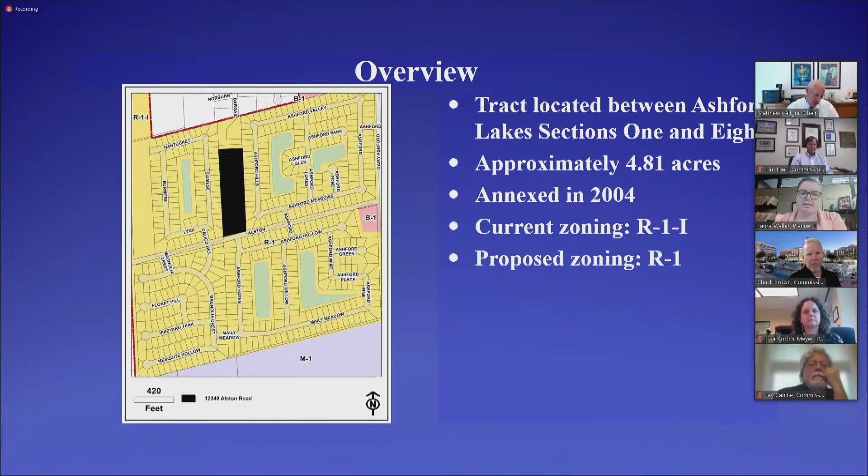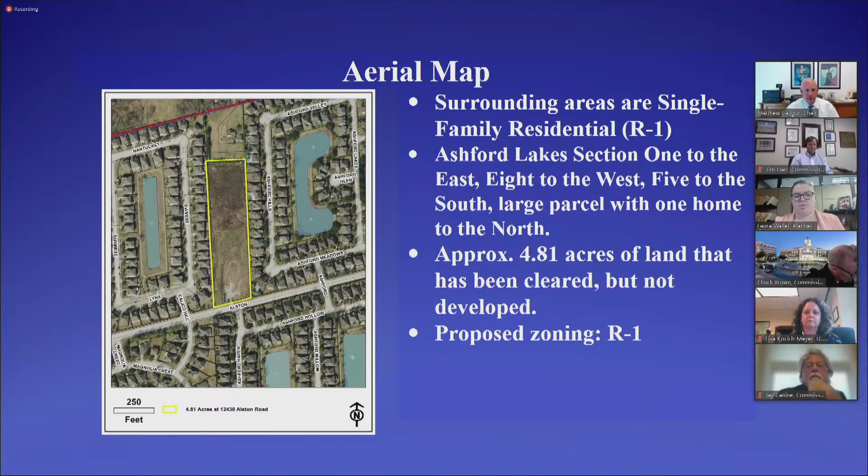Next slide. So here is an aerial map of the area. It has been cleared of all large trees, but there is some scrub brush, some taller grasses. Here you can also see that at the rear of the property is a large single family, more rural area. And then to either side and to the south is single family standard residential in Ashford Lakes sections 1, 8, and 5. Again, the property has remained vacant since its annexation, and so the owner is now ready to move forward with platting and developing the property as standard single family homes. Next slide.

The future land use excerpt and the comprehensive plan do categorize this property as a suburban neighborhood, which is in line with the surrounding uses and does align with the standard single family residential district. Next slide.

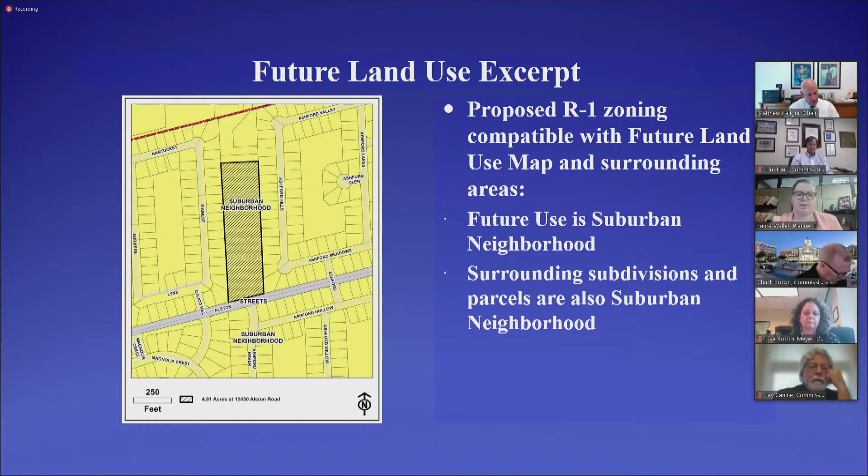The public hearing requirements were all met, and a courtesy sign was posted at the property, as well as mailers sent out to owners and the Ashford Lakes HOA. There was also published notification in the newspaper and online. We did receive 3 inquiries, 2 by phone and 1 by email. At the time of writing the slides we had one online comment form, but as of today we've had 4 online comment forms come in.

So there has been some concern from the Ashford Lakes HOA board members, just wanting to make sure that this was going to be single family homes and that it would not affect their property values negatively. Next slide.

So your initial points for consideration tonight: this is just under 5 acres and was annexed in 2004. However, permanent zoning is required prior to development. It's currently unplatted and undeveloped, just cleared. The requested zoning is compatible with the existing zoning districts surrounding it, as well as with the comprehensive plan and thoroughfare plan. Next slide.

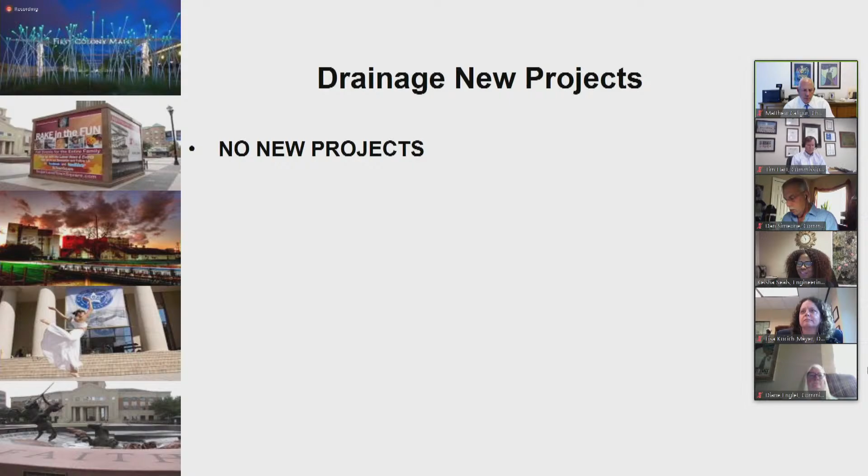The next slide is the municipal projects. There is one project being recommended to move forward in FY23: the Emergency Preparedness Program. This program will predominantly be funded through various FEMA and emergency management grants, which would require the city to have matching funds. This list is a prioritized program developed by staff and by best management practices, identified as far as equipment and infrastructure needs for continual emergency operations.

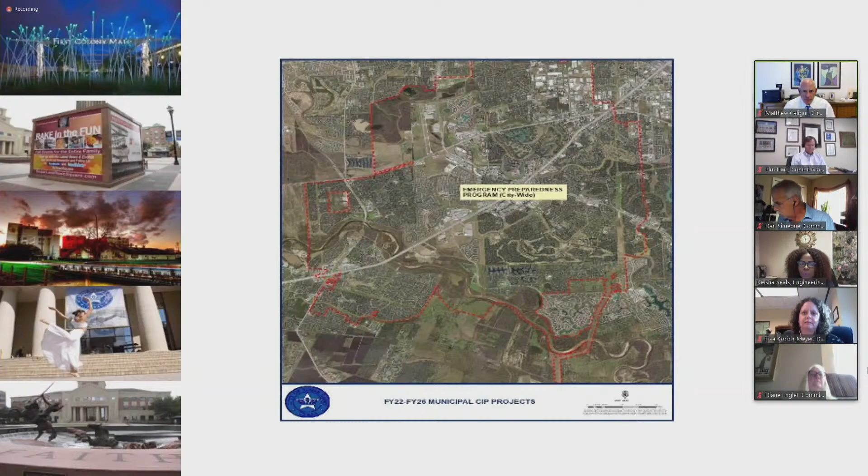Next slide. This project is a citywide project because it would help all facets of our emergency operations, and the map shown just identifies that it is citywide. Next slide. Next, we'll step into parks.

There are a couple of parks recommended projects to move forward. The first one is the 65-acre community park. This was recommended by our 2018 Parks and Recreation and Open Space Master Plan. This project will revisit some of the programming and lay out the park to create really a destination and centralized location within the city. It will also include improvements to the existing cemetery by designing for a historic and cultural destination site.

The next project is the skate park relocation to Crown Festival Park. The skate park currently is in City Park, but we are looking to relocate it to Crown Festival Park to allow for more synergy within that park, complementing the mountain bike trails we currently have and the proposed pump track we are looking to install. The project will also include converting the existing skate park to a covered pickleball court—different amenities, but definitely great opportunities to provide activities for our residents in both locations.

The next slide would just be the overall map showing the approximate locations for the 65-acre park as well as the skate park.

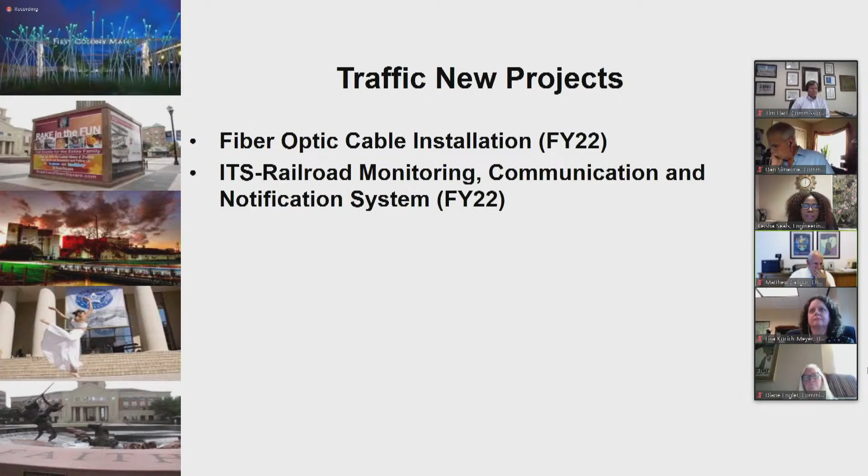Next slide, please. That's just a map showing the overview.

Stepping into surface water, there is one new project: the North Wastewater Treatment Plant Reuse Project.

As you know, we have an integrated water resource plan that has identified projects for the city to move forward in an effort to continue to be in compliance with the Fort Bend Subsidence District regulations, as well as make sure that we are efficiently and effectively having great quality of water resources.

So this PER will study the reclaimed water facility at the North Wastewater Treatment Plant, which of course is located off of 59.

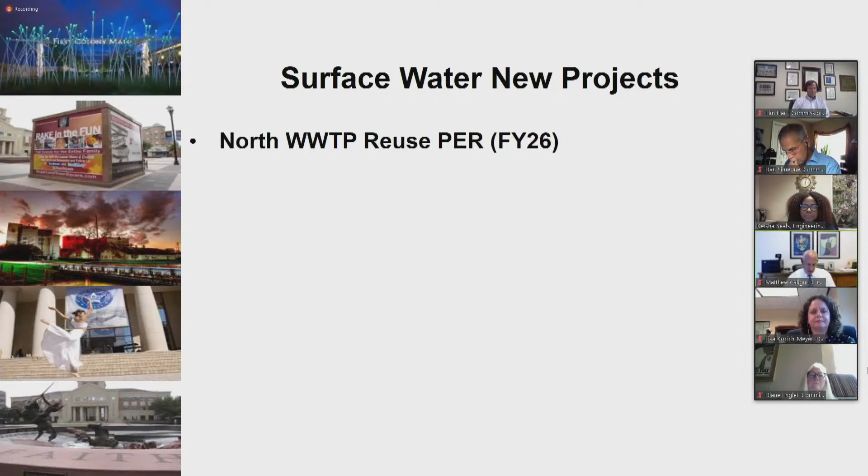Next slide, please. And there's the map.

Stepping into wastewater, there are several projects identified in our wastewater program. The first one is a citywide wastewater generator assessment project.

This is a programming project, and you will also see this in the water projects. This project has been identified based off of the winter freeze that we had in 2021.

It was determined that there was a greater need to invest in the rehabilitation and/or replacement of different generators. So the goal of this assessment is to identify the current conditions of all of our generators and see what needs to be done in those locations.

Whether they need to be replaced or whether they can be rehabilitated. The next project is the West Wastewater Treatment Plant Expansion Study.

This is a study based off of a previous study that evaluated the potential flows contributing to the West Wastewater Treatment Plant or the North Wastewater Treatment Plant service areas. That study determined that the West Wastewater Treatment Plant service area would provide a better alternative for conveying future flows from our areas.

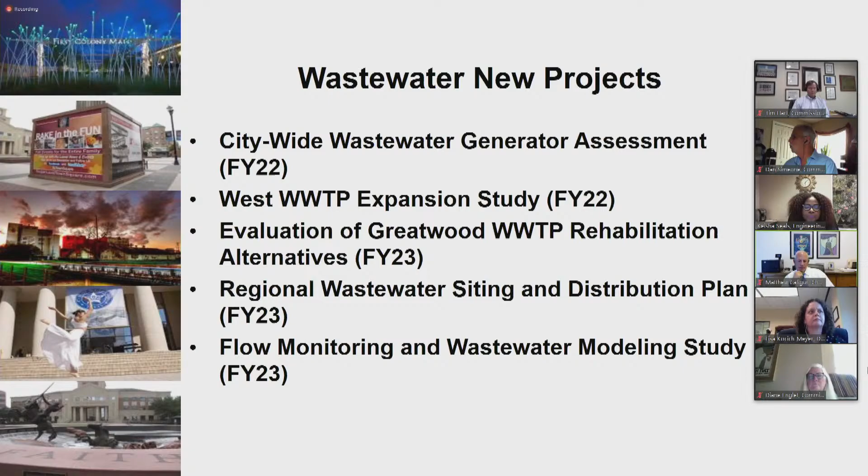So the first one, again, we talked about the wastewater generator assessment. This is the equivalent for the water side, so I won't really get into it. It's basically doing the same thing. These projects will run concurrently as well.

The next one is the main system water modeling study and capacity recommendations. Again, projects that you are seeing tonight mostly came from our wastewater master plan or our water master plan. So this is a project that came from our water master plan. This study will complete the model for our city main system, which would provide staff with hydraulic models of the entire system and identify future capital improvement projects and planning level costs for those projects.

The next project is the utilities cost for the Soldiers Field Road project. As we identify roadway projects to be improved, we also often have the utilities that would need to be improved with that project funded from the enterprise funds or from the utility funds. Soldiers Field is an extension of the Soldiers Field Court from Highway 6 and First Colony. This project will construct a 12-inch water line that is needed to serve the future animal shelter, PD courts, and our emergency operations center within that area. I would say that this was also a 2019 GO bond project, so you will be seeing this come up often because that project is ongoing.

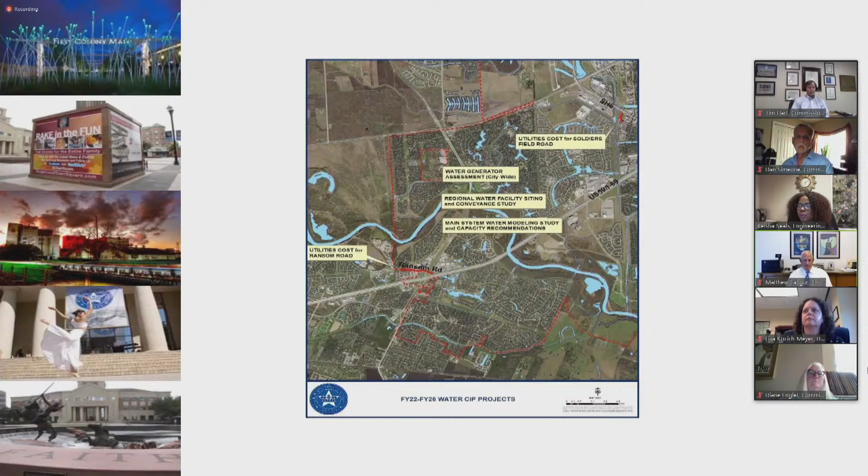The last water project is the Regional Water Facility Siting and Conveyance Study. Again, this is from our water master plan, and this is a model that will confirm what type of infrastructure improvements will need to be done at Greatwood for our capacity to serve the growth projected in our ETJ. This study will analyze the regional service alternatives for that area. Next slide, and this is just a map showing those locations, approximate locations.

And with that, that is the end of the presentation. So staff is asking that the Planning and Zoning Commission recommend the FY 22 through 26 capital improvement program, new projects list to the city manager and city council. And with that, I will entertain any questions you may have.

Thank you, Keisha, for that very detailed, helpful report. We'll go through the line and see if we have any questions from our commissioners. Commissioner Anglin?

Keisha, thank you, that was very informative. I learned a lot more about the details involved there, and I want to thank you for all the time and effort you put into that. The street modifications, I know our residents are going to be very happy with the choices y'all made to make those improvements. So other than that, listening to your other projects, I don't have any questions at this time. Thank you, Commissioner Hart.

I guess I'm surprised there's no drainage projects. That's pretty surprising. So if you recall, a lot of our drainage projects have been moved into the GO bond, and there was a 2019 GO bond approval of the drainage projects that are currently ongoing. So there are no new drainage projects because there's no new bond.

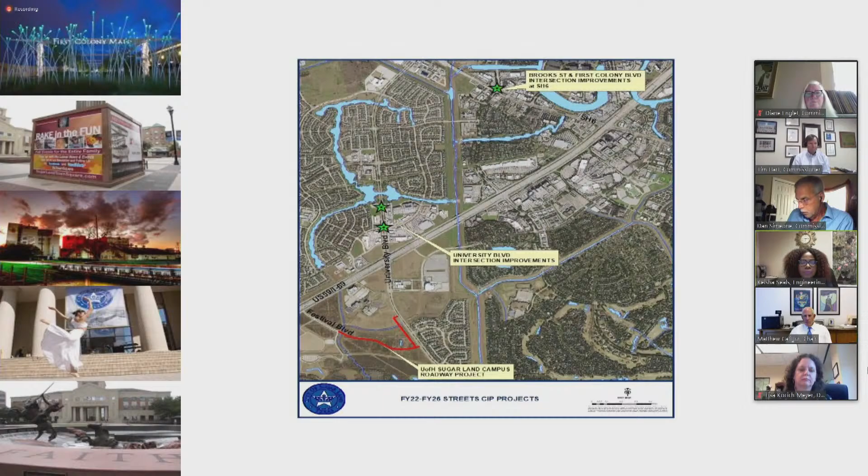Okay, I'll rely on the traffic professionals. I know it looks like a road to nowhere to me, but right. But we've certainly been working very closely with U of H, and trust me when I say they will not allow us to put a road to nowhere that will not benefit them. Unfortunately, this map does not show their campus layout. If we had the campus layout on this map, you would have a better understanding of how the roadways connect, both for them as well as for the city's parks. Okay, thank you very much, Keisha. Absolutely.

That's all I had, Commissioner. Thank you very much, Chairman. Commissioner Brown? Keisha, again, nice job on this. I think the wish list is long here for what's going to come in the future. Help someone out that's kind of new to the commission, when does this go from the wish list to when it begins to meet the costs and getting on real budgets?

Absolutely, great question. So we actually, if the commission approves the list tonight, I will take that list to City Council on the first meeting in July, where they would have an opportunity to review the list themselves. In that meeting, though, is actually a budget workshop. So it would be the engineering department as well as the budget department that will go through the 5-year CIP, which will include the proposed list. And so that will start a number of budgetary workshops that we do with the City Council in the July, August timeframe. The list itself and the projects are typically filed in July, and the 5-year CIP that is fiscally constrained is adopted in September. And so October 1st, of course, starts our new fiscal year. So by that time, the funding has already been solidified and the projects have been approved.

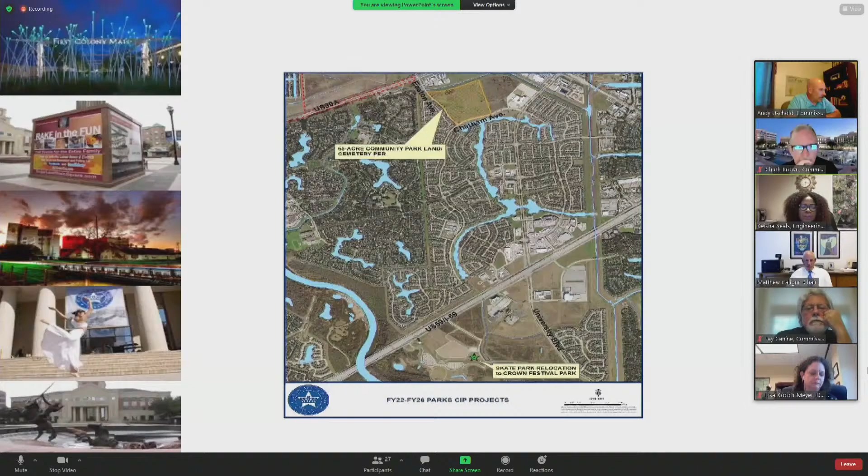They're a block away. Is there any coordination being done with these? No, because—well, let me have the Parks Department, who are on the call, step in, either William or Feng Du, because they may know more than I do about the coordination of the two cemeteries. William or Feng Du, do you want to take that question?

Yes, thank you, Keisha. Hi, my name is Feng Du, I'm the Parks Development Manager. I will start and William could chime in. As Keisha mentioned, these two cemetery sites are different.

The one on our city side is called the Old Imperial Farm Cemetery. It has a historic marker and is fenced off, to the very west of the green space you see on the map. The cemetery site that Fort Bend ISD has protected is actually outside of that green space, however it's very close to the east edge of the property. As part of the 65-acre community park, we'd like to use this opportunity to discover better ways to help preserve the historic culture of Sugar Land, and find a way to have a connection between the two sites so it provides more educational and cultural background to visitors. So that's part of the tasks we're thinking about.

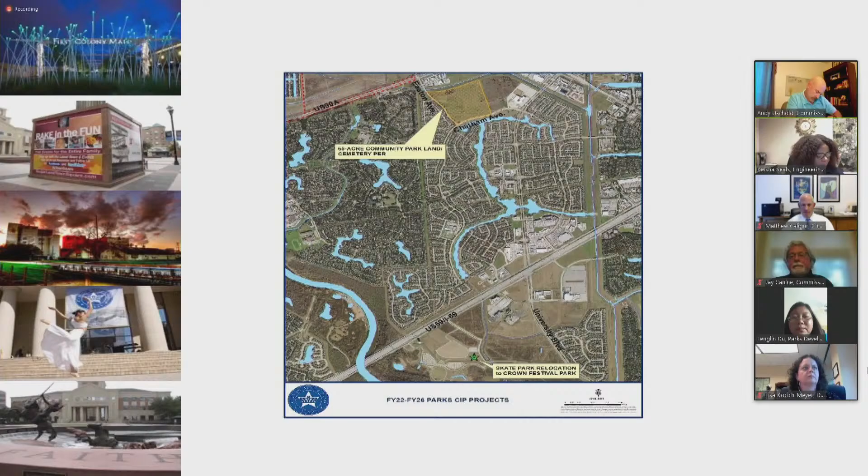I would just recommend to the city and staff—William, great to see you again, haven't seen you in a while—that there's a whole new regime at Fort Bend ISD, including a dramatic change in board members as well as an entirely new superintendent. So this may be worth exploring again, because I love the history we have here in Sugar Land, and I'd love to see this coordinated somehow so the city doesn't have to bear the full brunt of this. I think it's worth another look at Fort Bend ISD given their leadership changes. All right, thank you for re-educating on that location. Thank you for the questions, great questions, thank you.

My next question's on the streets. University Boulevard widening was on the previous year's list, and I'm trying to figure out the difference between the 2021 request to add the University Boulevard widening mobility bond project. Is this different? I don't understand the difference between the two.

Sure. The city had a 2019 GO Bond street project called the University Boulevard Widening Project. That project runs from New Territory Boulevard to just south of Lexington Boulevard, and would widen the existing roadway from 4 lanes to 6 lanes within the median. Due to mobility constraints and heavy traffic congestion in that area, we also looked at modifying intersections we hadn't previously considered—Westcott and Branford Place. Because of that, those projects were included in the 2020 Fort Bend County Mobility Bond, which was approved. So this project is for those intersections only, while the city's 2019 GO Bond project is for the actual widening. Does that make sense? It does, thank you.